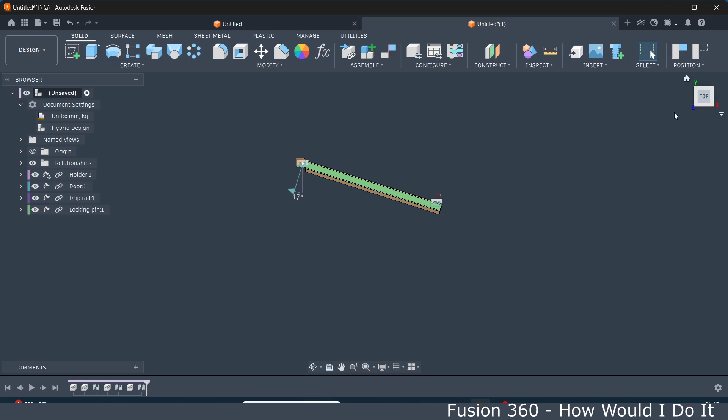In this video, we're going to look at how to insert external files, whether you created them previously or received them from someone else, into a Fusion assembly or hybrid file.

First, let's open a new hybrid design file. I always choose the hybrid environment because it gives us the flexibility to design new components from scratch while building our assembly at the same time.

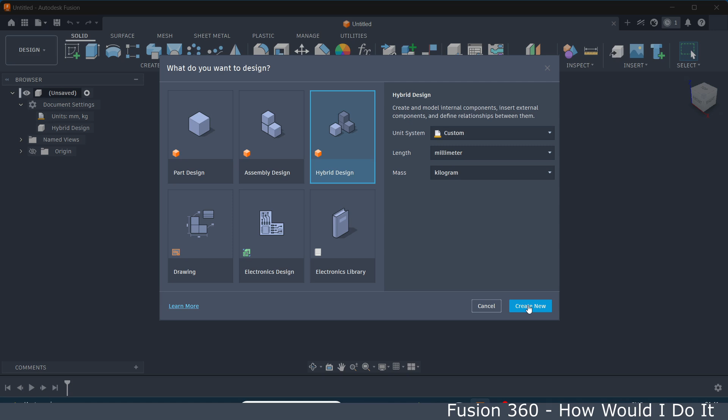Now that our new design is open, we head over to the Data Panel to select the components we want to bring in. For this project, I'll be using the parcel locker door components that I designed earlier.

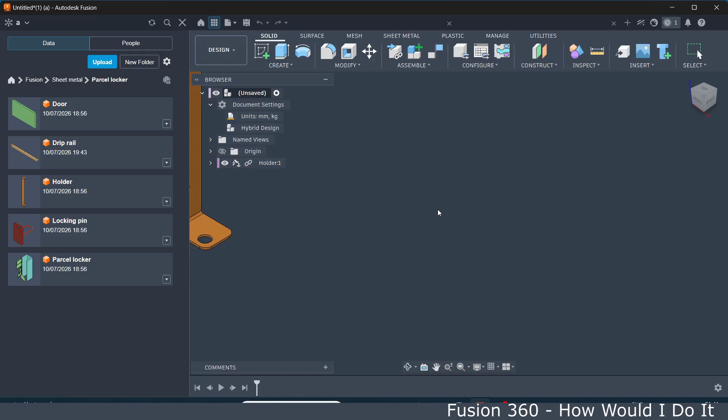First, I'm going to insert this holder. It's a simple drag and drop, and the component is now inside our design. Notice this small anchor icon right here.

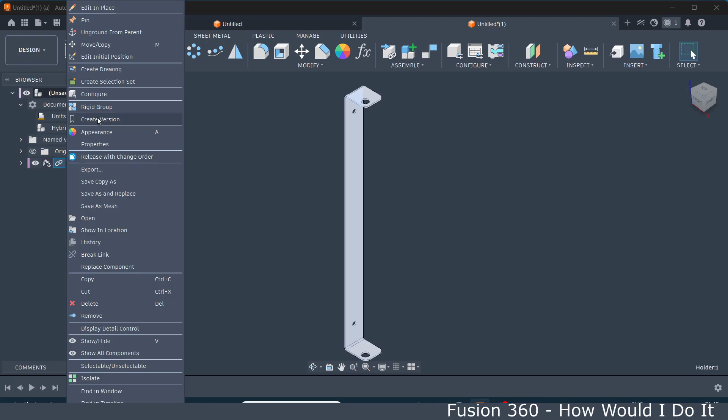This indicates that the component is grounded, meaning it is locked in place and cannot be moved. If you ever need to move it, you can simply right-click and select Unground from Parent, and as you can see, it is now free to move.

But for this assembly we want it fixed, so let's hit Undo. This holder will serve as our base.

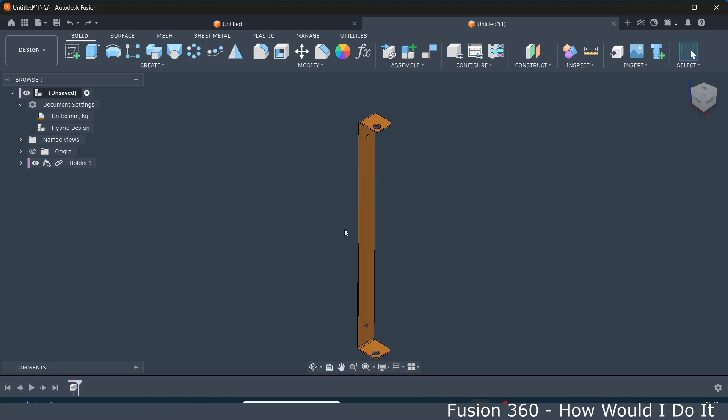Next, let's go back to Data Panel and bring in the door. Once again, just drag and drop it into the canvas. Now we're going to create a joint to connect the door to this holder.

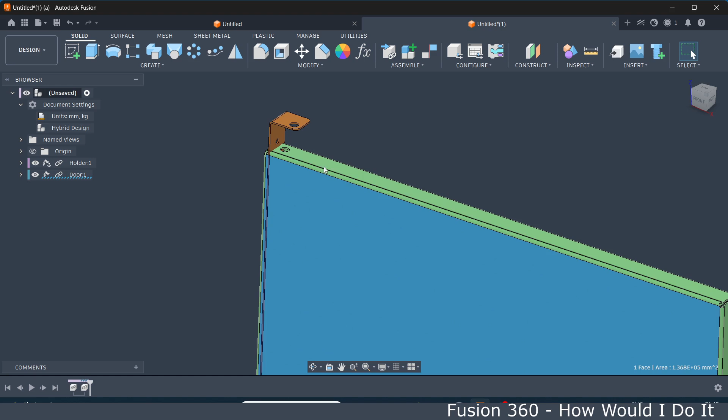To connect the door to the holder, we are going to use a Revolute joint. Let's go to Assemble, select Joint, and then select the center of this cylindrical bore and the center of the corresponding cylindrical bore on the other part.

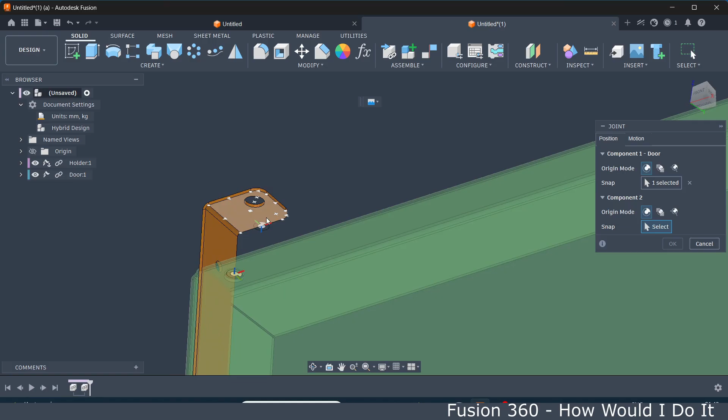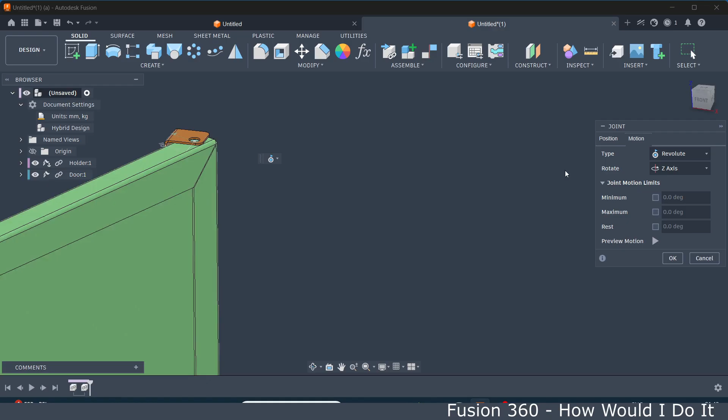Next, inside the Joint dialog box, switch over to the Motion tab and select Revolute. Take a quick look at the preview to verify that it's moving along the correct axis. Everything looks good, so let's click OK, and these two parts are now jointed.

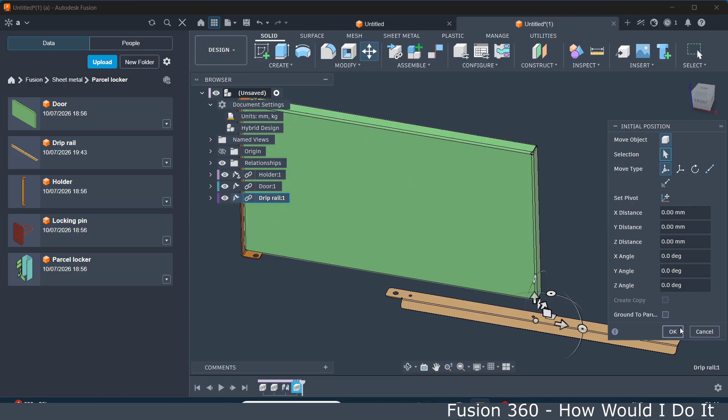Now let's bring in the next component, the drip rail. Just like before, it's a simple drag and drop. We want to rigidly attach the drip rail to the door.

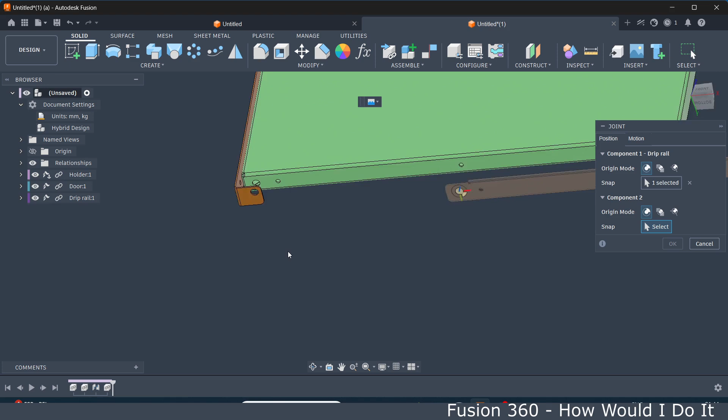Once again, go to Assemble, select Joint, and under the Motion tab, change the type to Rigid. Now select the center of this cylindrical bore and the center of the cylindrical bore on the other component. Click OK, and it's jointed in place.

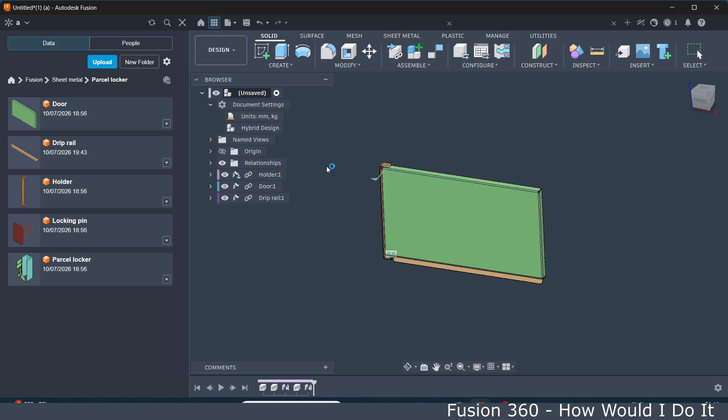Finally, let's insert the locking pin using the same drag and drop method. I'll move the component slightly to the side so we can see it better. Go to Assemble, select Joint.

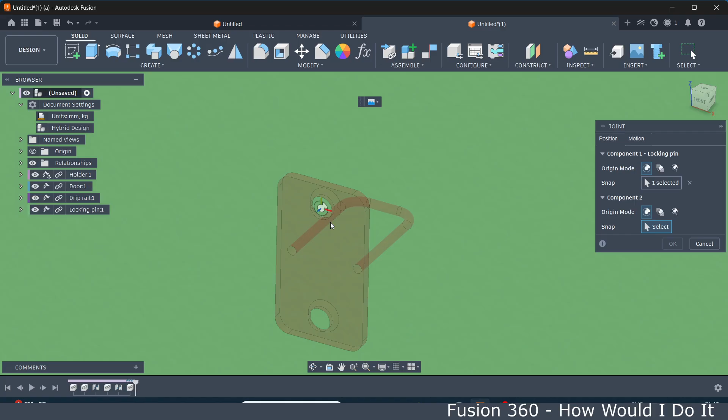The rigid joint is already selected by default from our last step. All we need to do is select the center of this cylindrical bore and the center of the mating cylindrical bore, and then hit OK. And that's it.

Everything is successfully jointed and our assembly is complete.

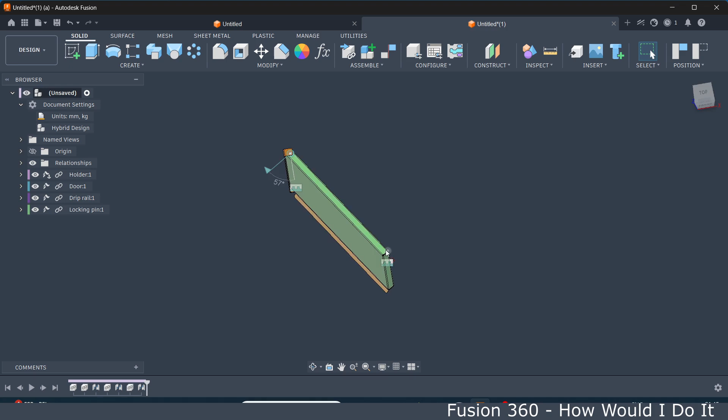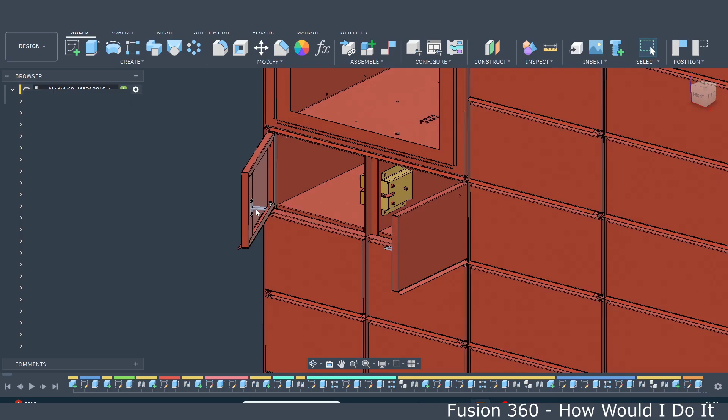Now I'll show you the final result of the entire parcel locker. Every single door, holder, drip rail and locking pin in this assembly was brought in and jointed exactly the way you just saw.